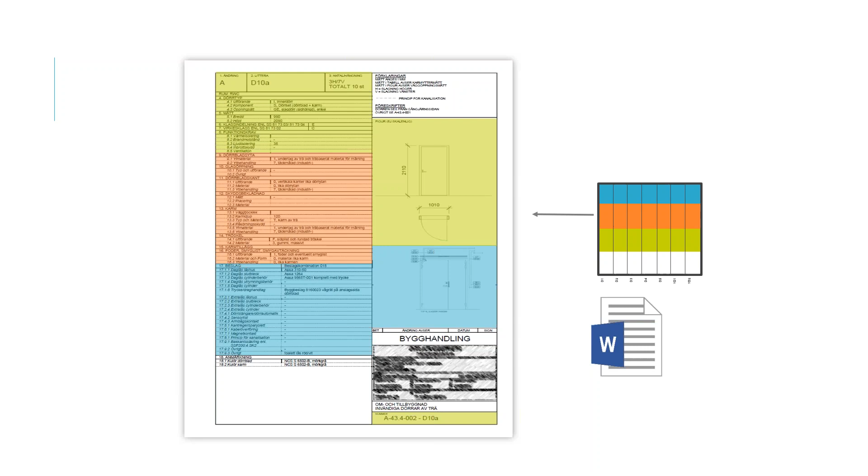What is Room Manager and how can we benefit from it? First of all, when you are working in a database, it allows you to share your information in real time. That's number one. Number two, it's very easy to add information to the database.

That allows a lot of people to see the information immediately, and if we want to change information in the database, we can do that very easily. In an easy way, we can have an overview report, the template that I just showed you. I'm going to show you now in an easy way how you can print out the templates from the database.

If we compare this to how we traditionally do a room card - you have, for example, Word, you're typing in a description of the room, and you have the file on your computer. You can always share the file, but you can never be sure it's the latest version, and you cannot work on the file with more than one person at a time.

In a Room Manager application, it allows several people to work at the same time, add information, pick out information, sort information, and so on. This allows us to simplify our work, secure our work, and get a higher level of safety in our work.

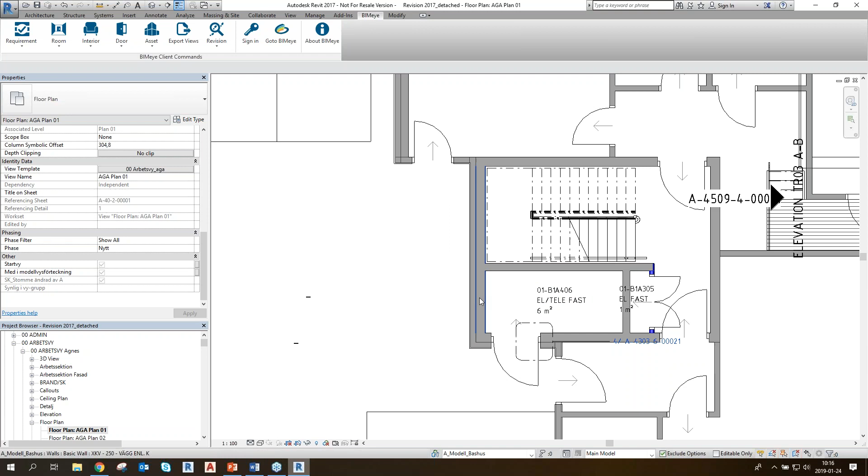The information I'm going to send now to the database is coming from my model. To spare some time, I've already built the model and added my information to my Revit model. For an example, we're going to take this room. If I just pick the room, I can see here in my Revit properties, under identity data, several pieces of information I added today. For example, under name I have the room name, I have my room number, I can add a description here, I can add colors — I can add as much information as I want in my model and choose which information to take from my model and send it to the database.

And I can do the exact same thing in the database. I can add as much information as I want and choose to send it back to my model. For this example, I'm going to show you a few parameters that I'm going to send over from the model to the database, and I'm going to add all the other information in the database. For example, the information I'm going to send over is my room number and my room name, and that's good enough for the moment. Before I can synchronize with my database, I have to do a few adjustments and some installation on my computer.

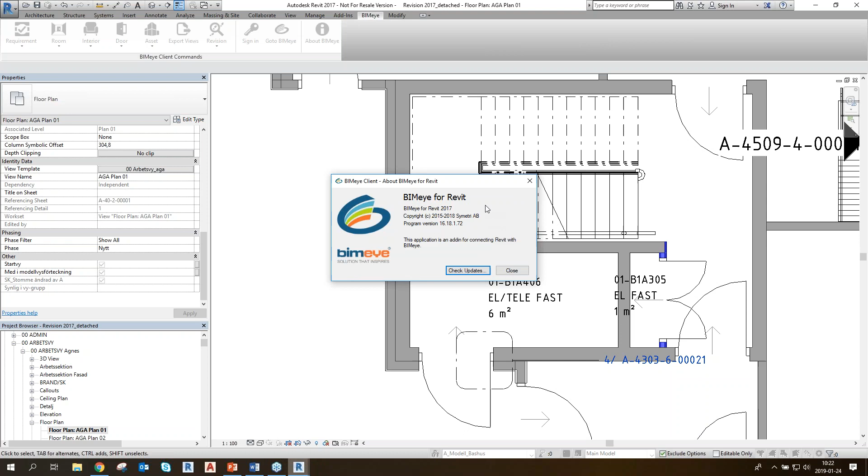It's the BIMeye client. Before making the connection between the model and the database, we just want to ensure we have the latest model and the latest version of the client. Click on 'About BIMeye' to see which client version you have, then click check for updates. It tells me it's not necessary to update since I have the latest one installed, so that's good.

I close that, and now I'll do the first thing, which is connecting my model to my database. Using the sign-in button here, I check in and sign in with my login information received from the BIMeye team—the username and password.

Over here we have something we call the project grid. If we go back to the database, we have the project grid over here.

I can easily click on copy grid here, or just select the whole grid and press Control C to copy it—doesn't matter which, it's the same thing. I'm going to copy my grid now, and it says the grid is copied.

I go back to my Revit model, and under the project grid here, I'm going to paste it in by typing Control V.

When I've done that, I have to choose my model name. It's very important to choose a model name and not reuse one, because the model name and the project grid are connected to each other. I can have several models connected to the same database, so it's important to have different model names for each.

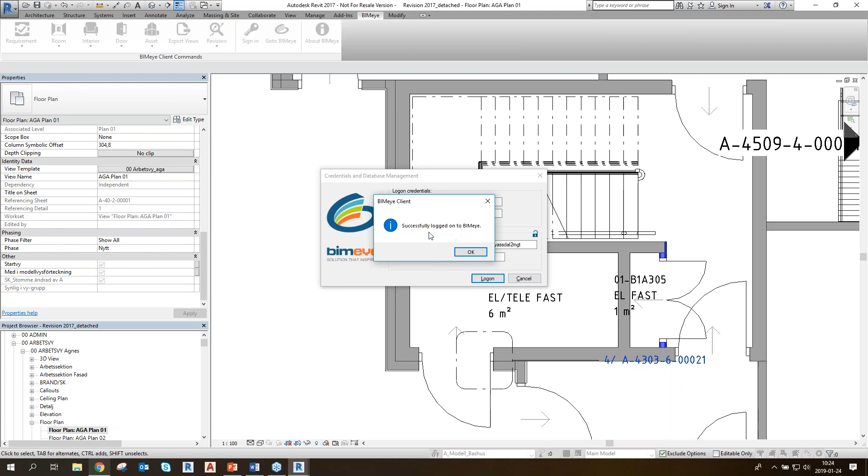So for this example, I've pasted in my project grid and I have my model name here. I'm going to hit the log on button, and it tells me I've successfully logged into BIMeye. So now I know the connection between my model and the database is okay.

Before I synchronize for the first time, I'm going to do a quick checkup in the database to make sure everything is okay. If I go back to my database, I'll see I have all the applications here: the asset manager, door manager, interior manager, requirement manager, revision, and room manager.

If I click on each one, I can see, for example, this is the interior manager, and I don't have any model connected to it. If I go to the requirement manager, I don't have any model connected either. That's because if I have one model and synchronize it to the database, it doesn't synchronize with all the applications.

Each application has separate sync buttons, and I'm going to show that in a few minutes. If you go to the Room Manager, for example, I can see I have one model here, I have objects here, and I can see when I did the last synchronize and what kind of synchronize I did - a full synchronize or a partial synchronize.

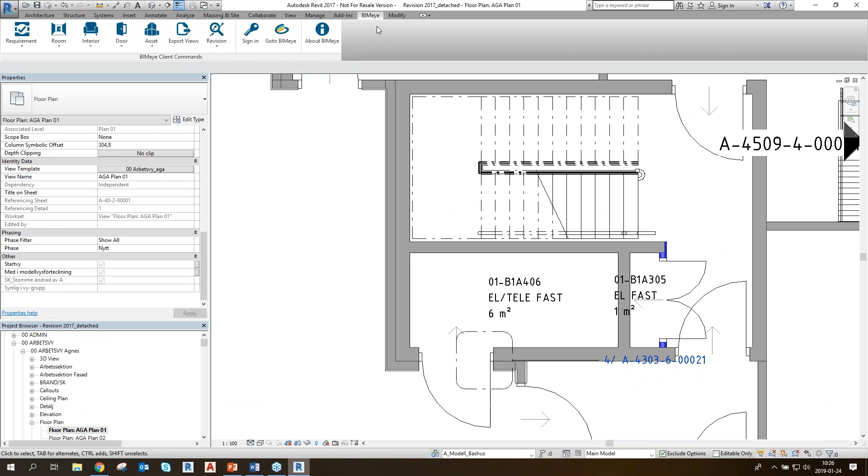Now I can go back to my model and see what buttons I have in my application here. The add-in will automatically give me all the applications. I can choose to have them visible, or I can hide them if I want, and only show them by application I'm working with.

So in this case, we're going to work with the Room Manager, and I have added information to the model - I have a room number and a room name. So that's good, and I'll go to my room application button over here.

I can click on the button and I can synchronize it with BIMeye. Then I will take one room, or I can take all the rooms at the same time. A full synchronize means I can synchronize all the model rooms at the same time. If I take a partial sync, I can take just one room or two rooms at the moment if I want.

I can create views from the room I'm working with, like a plan view picture, and export the image from the model to the database in a simple way. We can configure the parameters we've added to the room, and also export parameter information from this room to the database.

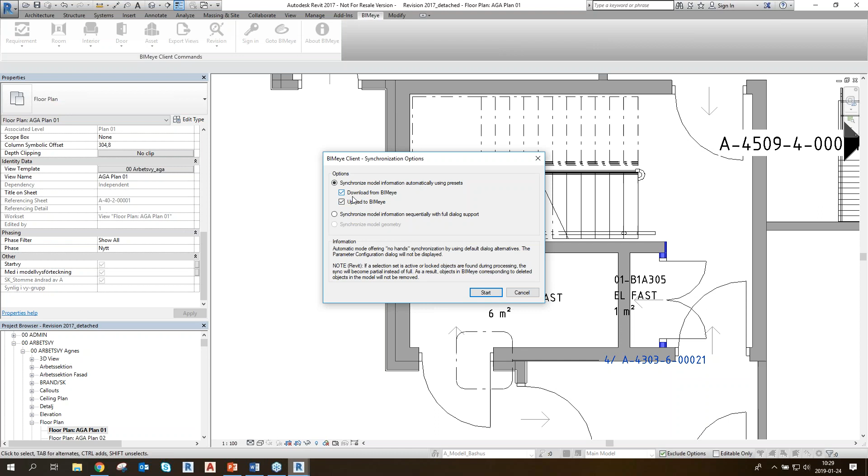In this case, I want to go both ways - download and then upload. I can just check one of the boxes if I want to. So I'll click start here, and it will start to synchronize with the database, sending all the room information I've chosen to the database now.

Now it's starting. You see, I have almost 1,200 rooms in this model, so it naturally takes a long time to synchronize all the rooms at the same time. You see here, I have 1,187 rooms to synchronize, and it's going quite fast.

When the synchronize is done, I'll get a dialog box showing the information I've sent and if the synchronize is okay. Here I can see my information - successfully, I can see what information I've sent to the database, and all the grids are connected to my rooms, and everything is good to go.

So now I have synchronized from my model to the database, and to see the information in the database I just have to refresh my browser. I'll see in Room Manager that I just sent over 1,187 rooms, and I did it at 10:30, matching the current time. This is the full synchronize I've just done - quite easy, quite fast to do.

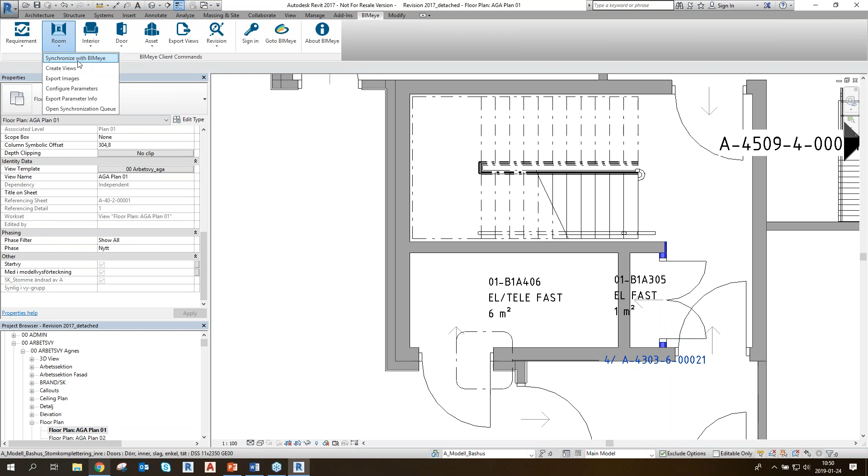Before I'm going to do a test printing of a report, I'm going to do a quick export of an image from, for example, this one. I can go into my room application over here. I can click on Create Views. When I click on Create Views, it's going to tell me what kind of picture or image I want to create.

I can just create a template if I want, so that I can always use the same template. It's going to only allow me to do a plan view of the room. I want an offset of the room outside the room of 500. And from which view template do I want to have my base from? I want to have it from my plan view.

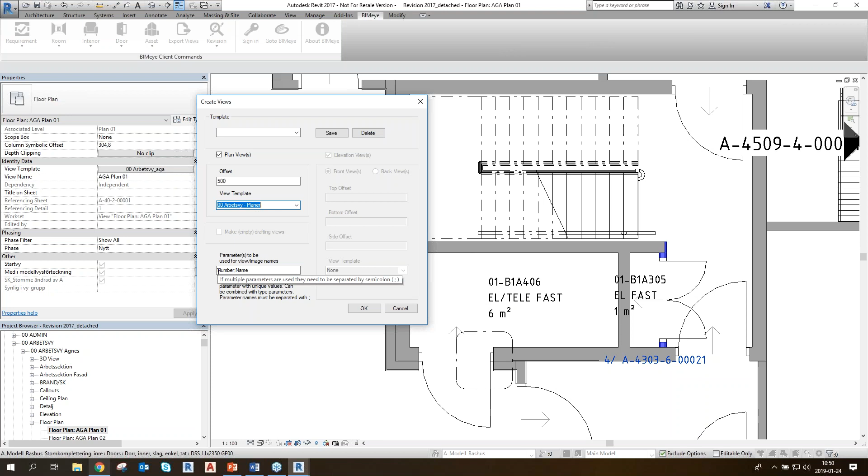And from which information do I want to pick to connect the view to? Yeah, I want the number and the name. I can just choose one of them if it's necessary. And I click OK here.

It's going to create the views now. I can select one view, or I can select full view selection by not selecting anyone. Then it's going to create views for all rooms in the project.

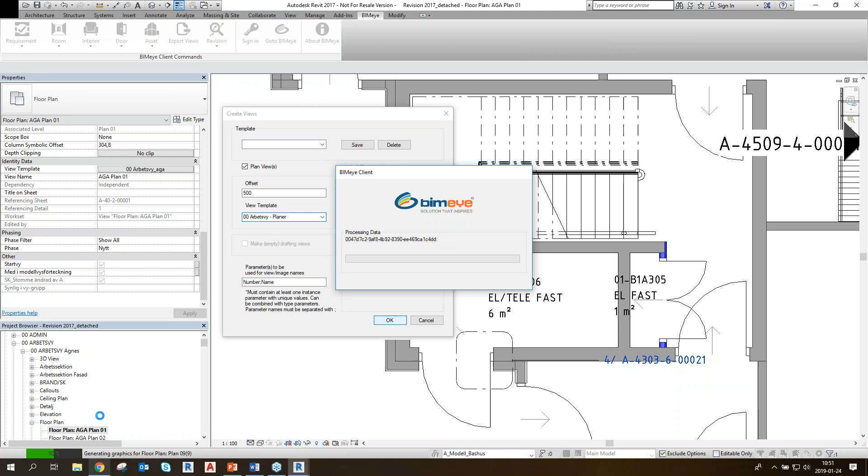That takes around 1 minute to do. You see here the processing is creating all the views now. As I told you before, I have around 1,187 rooms, so it's going to create 1,187 views also. The processing is quite good, quite fast, and quite reliable.

During the model's exporting the images now, I'm going to show you in the database. Yeah, it's almost done here. See the processing over here.

We can go to our... oh, it's almost done. It's still working, just processing over here. So we're gonna go to room lists now. I'm gonna see what's happening in the database.

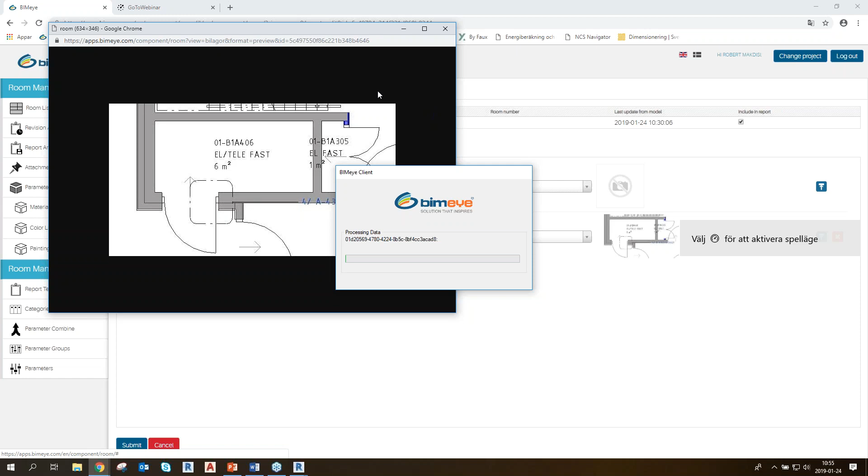We're gonna choose the room now, click on the picture. We're gonna choose picture, and we see over here the picture from the room that I just created. It's a window that doesn't want to go away from the screen here, something with my computer, so I apologize for that. So that's how we create the view and how we export a view.

Now I'm going to show you an easy way to take out a report. For example, if we have one or several rooms that we want to work with - I want this room, I want that one, and I want that one - I'm going to go into create room here. This window doesn't want to go away.

As usual, Revit is... just apologize for that. We're going to just... sorry. Sometimes when you're working with Revit it takes a little bit of time, so I'm sorry for that delay.